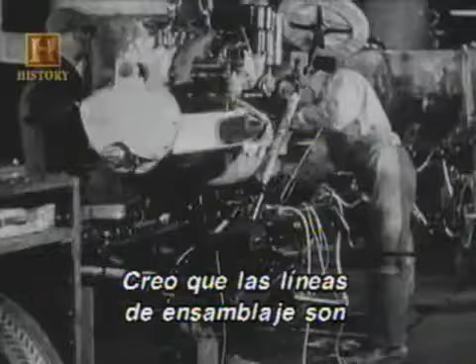I think the assembly line is the most significant technological development of the 20th century. Nearly everything that we use, we would not have it in the quantities we have it and at the prices we have it without the assembly line.

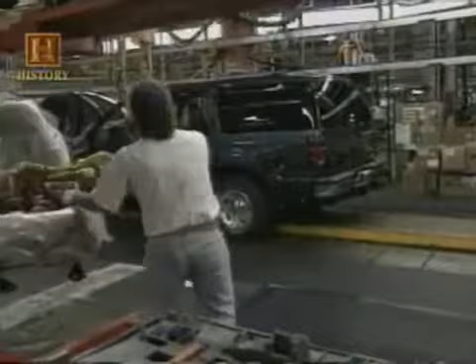I think the best way to define an assembly line is the way Ford did. He called it progressive production. Work moves to the person and moves past the person rather than the person going to the work. Parts are added until you come up with a final product. And that's what the assembly line is, essentially, work in motion principle.

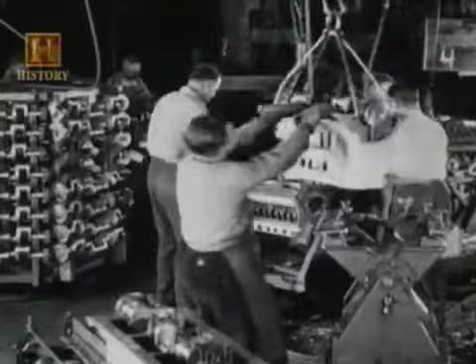Industrial society was highly advanced at the time the assembly line came into being, but once it came into being, it was so productive that very few things were made without the line after that. There are several factors that went into the making of the assembly line. The first had to be that the parts of any product that would be made on an assembly line had to be interchangeable.

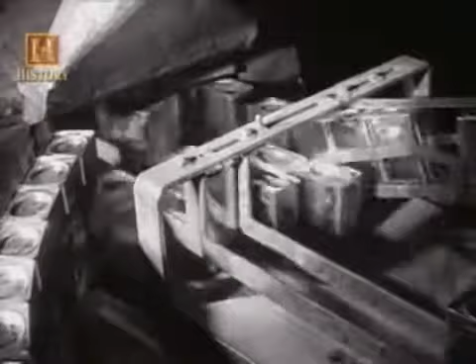And there in can making you have various machines that are linked together by conveyors, which cans are built, taken from sheet steel and built up into full cans.

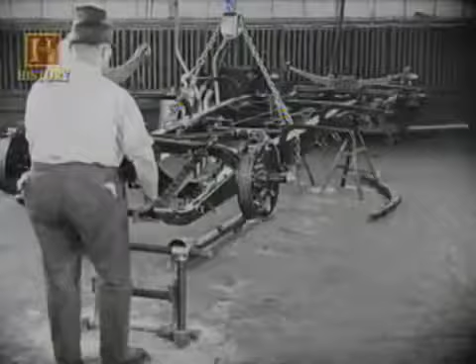He was averaging a doubling of production for several years before the assembly line. But this relentless drive for ever more production at ever lower cost led him almost inexorably to the techniques that eventually developed into the assembly line.

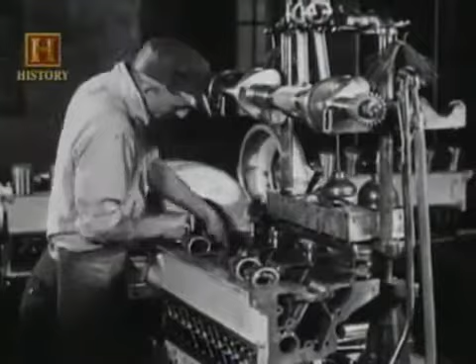Effectively, he Taylorized the work and took the skill out of the work process, dividing the labor, subdividing it again, so that a workman would do a smaller and smaller part of it. And doing the smaller and smaller piece of work, he could do it faster and faster.

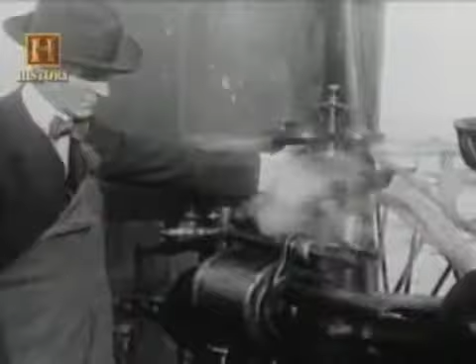The wondrous technology of the assembly line effectively was its undoing relative to labor.

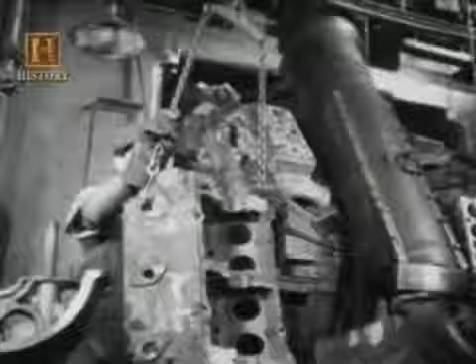It's boring, it's regimented, it's monotonous. It was very difficult to keep a lot of workers in these factories when they first started the moving assembly line.

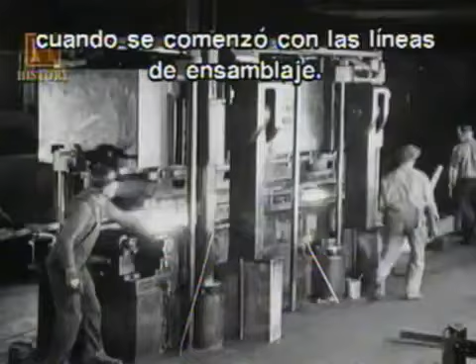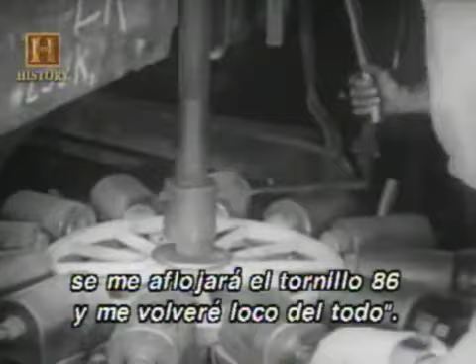A labor leader reported the comment of a Ford auto worker as saying, if I have to put on nut number 86 more times, I will be nut number 86 in the Pontiac bug house. Work became degraded.

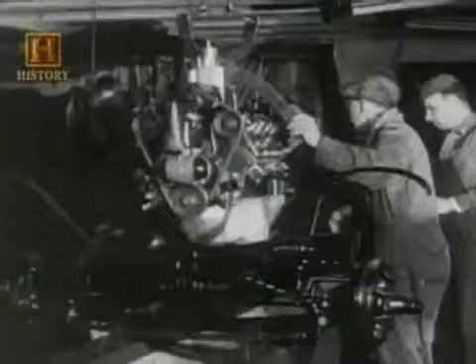A foreman in the Ford engine assembly plant talked about how in his shop, after they introduced line production, what he would do is he'd turn up the speed of the line a notch. The workers would move faster, turn it up another notch, turn it up another notch, and then the workers would scream and they'd turn it back one notch. They said we used to get 10, 15 more machines a day by doing that.

It worked. Turnover dropped, absenteeism dropped, and Ford workers sort of traded the high wages for the rotten work.

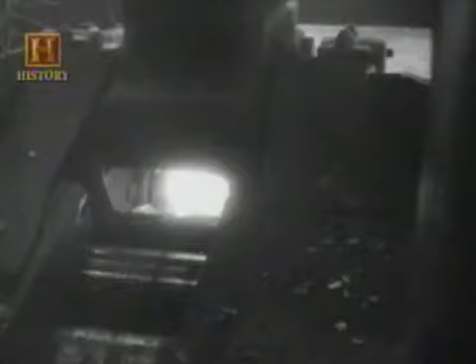I think what happens through the 1920s is that the line, the line speed, and the regime of work in the factory becomes harder, faster, more ruthless.

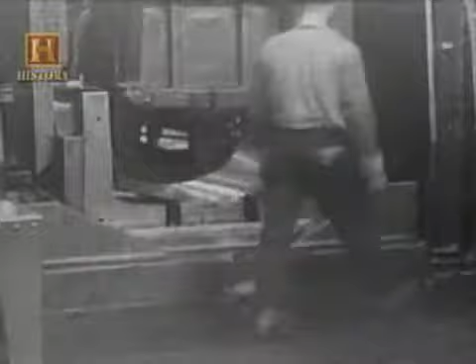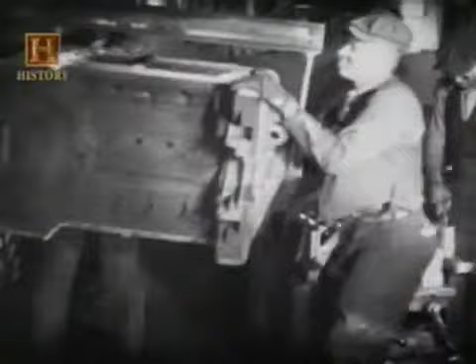Back in the days when he was a millwright, Ford Motor Company was the only company in the Big Three that had any blacks in skilled trades.

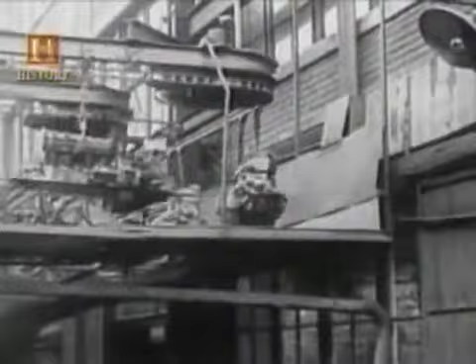First of all, it was a job. I had a job. The assembly line did a lot for a lot of people. It was a phenomenal thing, I guess is the best way for me to put it. The assembly line was a tremendous symbol of modernity, of productivity, of wealth.

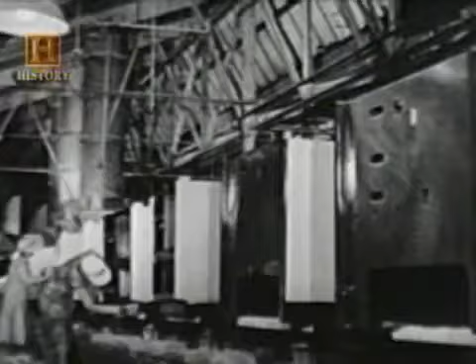You have companies like General Electric, Westinghouse that are beginning to make home appliances with moving line assembly. The assembly line allowed not only more stuff to be made, but more complicated stuff, higher quality stuff, things like radios and phonographs, things that had once been fairly high-end, a kind of material abundance that simply people had never experienced before.

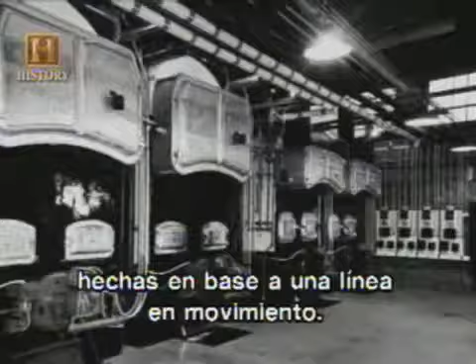A lot of things that actually went into custom-built homes had actually been mass-produced, things like fixtures, bathtubs, etc. Those were already mass-produced.

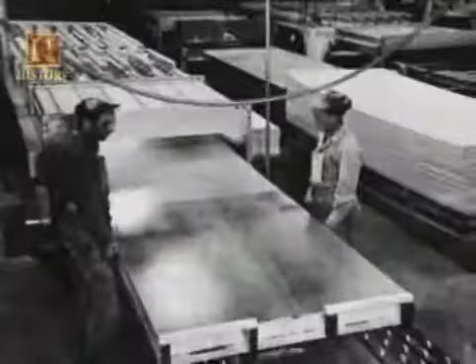Consumers, for the most part, have rejected mass-produced houses.

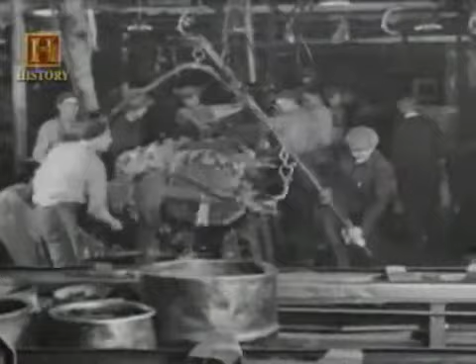En 1927, Ford abandonó a regañadientes el confiable modelo T e introdujo uno nuevo. It was an enormous, wrenching change to shut down his factories, retool them to produce the next car, which he called the Model A, a very different, much more modern automobile than the Model T.

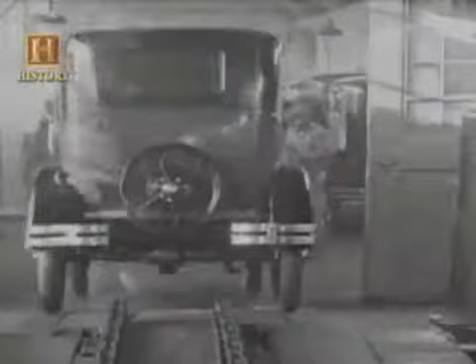El cambio al modelo A le costó a Ford más de $250 millones. Tras haber producido el modelo T durante 19 años, el modelo A requería de un cambio de manejo de sus 5.580 partes, casi todas las cuales eran nuevas. Era una lección extremadamente dolorosa acerca de la demanda de los consumidores.

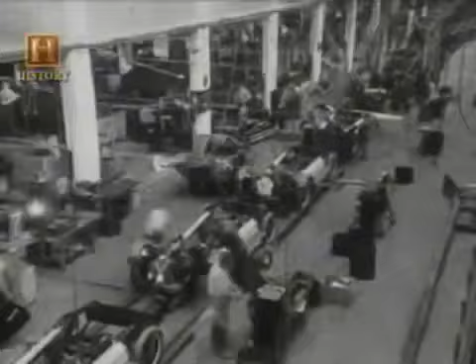General Motors was able to make those kinds of changes much more easily because they had never pursued things as far down that cul-de-sac as Ford Motor Company had. A diferencia de Ford, con sus monumentales plantas industriales, General Motors era capaz de producir diversos modelos porque tenía varias plantas más pequeñas con líneas de ensamblaje dedicadas a los diferentes modelos. El cambio de modelo anual introducido por General Motors pronto se convirtió en un rito para los automovilistas y consumidores estadounidenses a quienes les gustaba la variedad.

Después de más de una década, los fabricantes habían aprendido a dedicar sus líneas de ensamblaje a satisfacer la cambiante demanda. Para 1941, durante la Segunda Guerra Mundial, no había ningún consumidor más grande ni exigente que el gobierno de Estados Unidos. I think Lewis Mumford said that really there's no kind of demand like demand that comes about through warfare, because first of all, you need a lot of things and you destroy a lot of things. Creates this tremendous demand. Here is the arsenal of democracy at work.

One plant among thousands dotted across the vast United States. Las líneas de ensamblaje automotriz de Detroit fueron transformadas. Effectively, what you're doing is create something entirely different. That process of conversion over to wartime industry is one where the whole shop floor is just literally in turmoil.

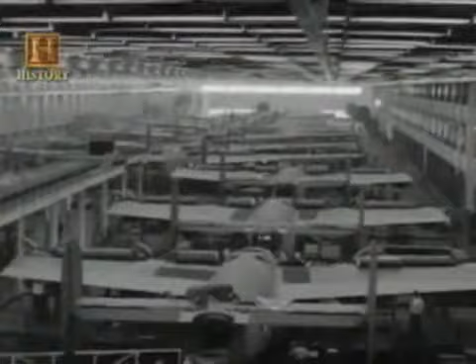Una industria que había sido acondicionada para producir los 32 millones de autos utilizados por los civiles, reenfocó, reajustó y renovó su compromiso para liberar el inagotable poder de las líneas de ensamblaje de tiempos de guerra. Plants that build tanks like these, huge lumbering juggernauts, in numbers that stagger the imagination.

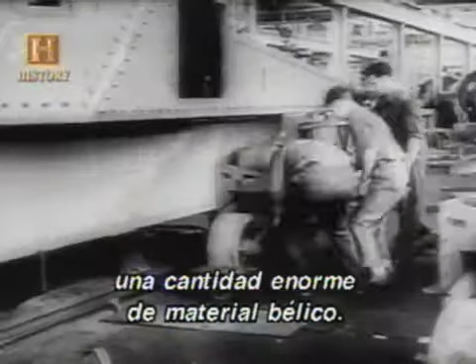If you look at the history of the war, you'll see that the United States created a tremendous amount of war material. World War II also sees the coming in of large numbers of women and large numbers of African Americans. Prior to that time, it was believed that neither women nor African Americans had the skills to work the machinery and the heavy equipment that was tied to the industry.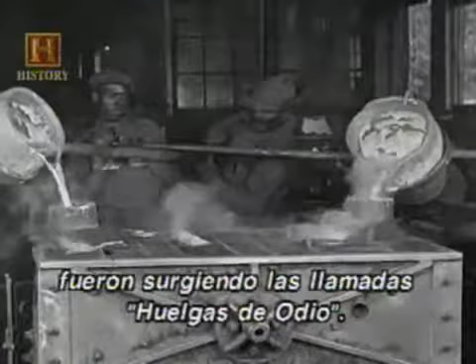There's a lot of contention in the auto industry through the war years. As African American workers are upgraded to the machines and the assembly lines, there are sometimes what are referred to as hate strikes, where white workers would go on strike because they didn't want to see the upgrading of African American workers. The same thing occurred with women workers sometimes.

A pesar de un ambiente realmente hostil, las capacidades de los afroamericanos y de las mujeres fueron demostradas claramente por su rendimiento. This is mass production, as only American engineers know how.

A finales de la guerra, en 1945, se habían producido 90.000 bombarderos, 57.000 motores de avión y 250.000 tanques y rústicos.

One of the major reasons that we won World War II was because we were able to produce all kinds of war material, from tanks and airplanes to clothing and helmets, at a faster rate, at a cheaper price than any other nation on earth. So we were able to build ships faster than the Japanese and the Germans combined could sink them.

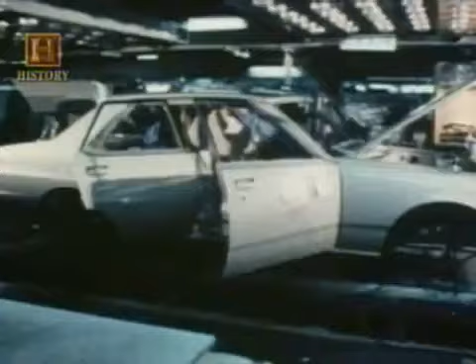Al regreso, el Japón de posguerra reconstruye las líneas de ensamblaje. I think you could say that Henry Ford invented the assembly line for the car, and that Toyota perfected it.

Después de la Segunda Guerra Mundial se decía que la productividad estadounidense era 8 veces mayor que la de Japón, que estaba devastado por la depresión y la inflación. The Toyota situation in the post-war period, back in the early 50s, they really had nothing in terms of resources. It was a resource-poor country. They had no opportunity to waste. Any materials they had, they had to somehow use.

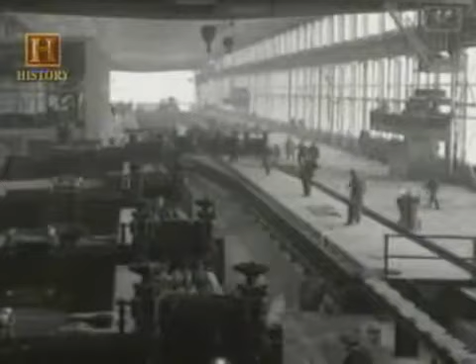En 1950, Eiji Toyota, entonces un joven ingeniero japonés que esperaba reconstruir el negocio de su familia, pasó 3 meses en el complejo Rouge, la instalación manufacturera de automóviles más eficaz del mundo. A diferencia de muchos fabricantes de la época, Henry Ford no sentía temor de compartir el alcance sin precedentes de sus técnicas de línea de ensamblaje con otros industriales.

Ford's assembly line worked great when you had high volume and low variety, hopefully no variety, just one. But Toyota's situation was different. En esa época la Toyota Motor Company estaba produciendo 1.000 autos mensuales, mientras que en el Rouge se fabricaban 7.000 autos diarios. Sin embargo, este no era el único problema de Toyota.

Here they are making 1,000 cars per month. And all those, they had to make all kinds of cars. They had to make trucks, big trucks, big cars, little cars, limousines, fire engines, you name it. They had to make everything for the Japanese market.

It's necessity that compels the Japanese to redefine the responsibilities of labor in a system that is starved for capital and is only serving very low volumes of demand.

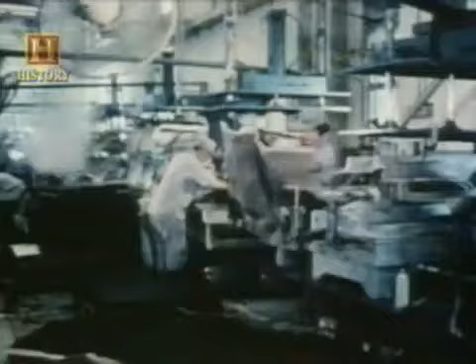Al contrario de las líneas de ensamblaje altamente mecanizadas de Detroit, Toyota construyó sus propias líneas alrededor de su recurso primario, el obrero. And to do that, they realized the most flexible thing in the entire operation are people. Not machines, not anything else, it's people. The Japanese never went as far down this road towards making the worker merely a cog in the machine as we did. They were actually using their workers' mind power, and we had forgotten about that.

En lo que fue considerado un cambio fundamental en la técnica de la línea de ensamblaje, Toyota reorganizó el trabajo, redujo los desechos y le permitió a los obreros definir sus responsabilidades en un proceso llamado manufactura lean. Every job that you see on a Toyota assembly line has been slowly and steadily improved and fine-tuned over the years by every operator who's done those jobs. Toyota managed to involve the workers, to engage the workers, and to give them jobs that actually provide more fulfillment on the assembly line.

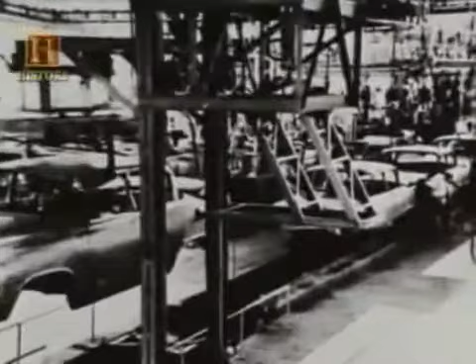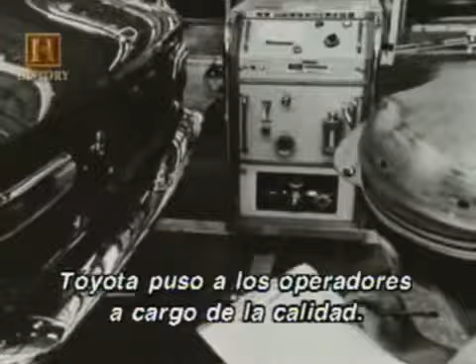Los obreros no solo tenían el deber de definir y mejorar su trabajo, también se les asignaban diversas labores. They do low-end maintenance. They do low-end housekeeping. That means that you have much less support staff in the factory. You have fewer material handlers. You have fewer janitors. You have fewer maintenance personnel. You have fewer inspectors. Toyota said the operators, the plant floor, is in charge of quality. If you have a problem, you stop the line right now.

De ese modo, cada obrero en la línea de ensamblaje se convertía en un inspector. La calidad y la productividad aumentaron porque los obreros podían hacer mejores partes en un primer intento. The productivity tends to be higher in a lean production plant because you are obligating workers to take on tasks which previously would have been carried out by indirect support staff.

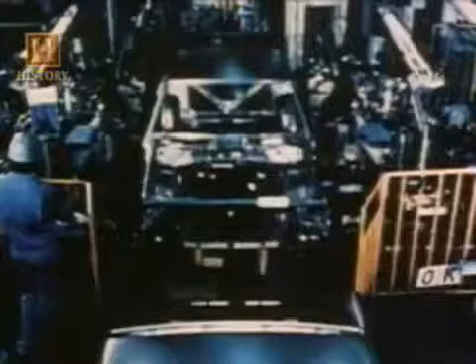They didn't know exactly what number of different products they were going to be making every day, so they had to be prepared to make those every single day. Las líneas de ensamblaje de Toyota requerían que sus obreros fueran diestros, motivados e innovadores, ya que una vez que la producción fuera establecida, los obreros eran responsables de realizar mejoras continuas, un proceso que llamaban Kaizen.

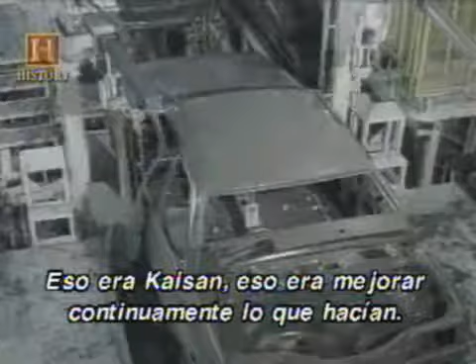You would remove 10% of the workers, 10% of the time, 10% of the resources that backed up that process, and force the remaining workers to figure out how to now get that job done with 90% of what they had before. And so that would be Kaizen, the continuous improvement element of it. Once they had reestablished a certain balance, then you take out 10% again, and you continually ratchet downward the resources available. That is what makes it lean, because you have only the bare minimum necessary to get the job done, and you keep pressing it downward to see what you can achieve in the way of maximum efficiency in terms of productivity.

En los años 70, las líneas de ensamblaje de Toyota estaban preparadas para aprovechar las cambiantes demandas de los consumidores estadounidenses de autos más pequeños y de mayor rendimiento.

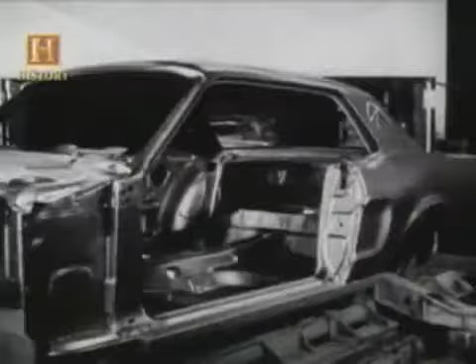To be on your feet 12 hours a day, 7 days a week, was a completely new experience for me.

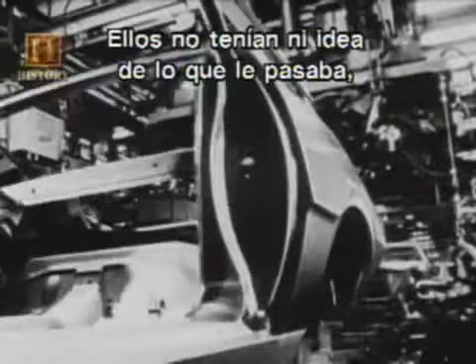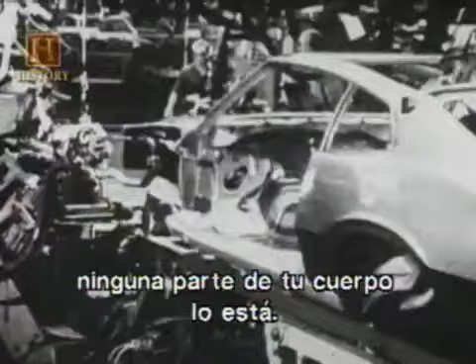I had no idea exactly what she was going through until I came to the Rouge complex and I was hired on by Ford. Sometimes at night I would wake up and it would feel like my hands were the size of a watermelon, and I'd have to open my eyes to look at my hands. Your body isn't made to work at that speed. It just isn't. No part of your body. And I took a tour of every plant in the complex, and when I got to the frame plant, my eyes welled up with tears to think my mother actually performed this work. I couldn't do it. You have to be strong to be able to do that. So your mind has to be strong. So I'm really proud that I'm still sane.

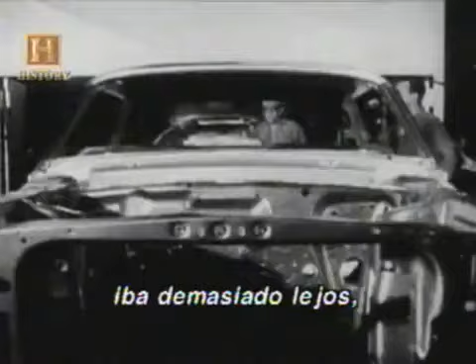What they eventually found was that the application of these principles to the moving assembly line, which required extreme mechanization, went too far and pushed the human element in the production process to the extremes, and people rebelled against that.

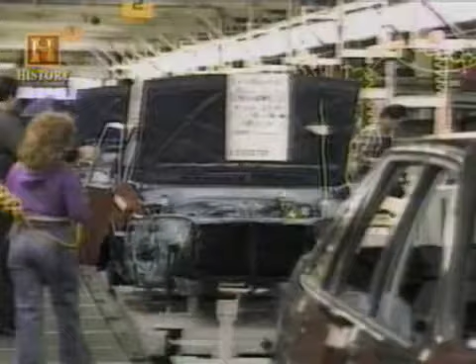The challenge is to make that assembly a lot more user-friendly to people. So as we future the assembly line, we really become a lot more people-oriented. I've seen lines that were ran manually with people on every job turn to automated lines, and it's steadily happening. So it's a big change just in the 6.5 years that I've been there.

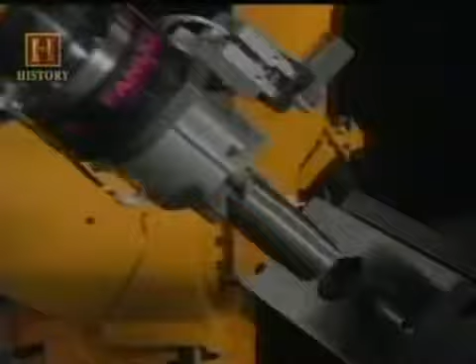Little did they know that science fiction would become assembly line fact in less than half a century. The first kind of tasks that started to get automated were things like welding and painting, environments that weren't people-friendly.

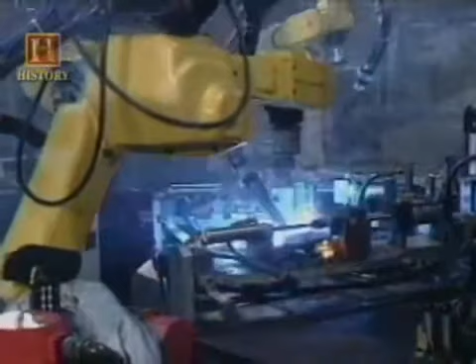Los robots fueron asignados originalmente a las labores de pintura en las líneas de ensamblaje automotriz porque siempre habían representado un riesgo para la salud, mientras que la soldadura requería de extrema precisión y destreza. We weren't trying to displace workers, we were trying to gain consistency, quality improvements, as well as actually benefit the worker by being able to take away tasks that weren't pleasant.

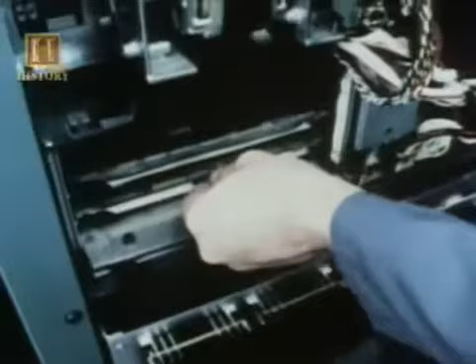Un cambio fundamental hacia las tecnologías computarizadas en el último cuarto del siglo XX llegó a eliminar casi el 37% de los empleos en las líneas de ensamblaje automotriz. Most of the people that are there today are not actually running equipment, they're maintenance people tending the robots. Hoy, los robots con microprocesadores de la línea de ensamblaje pueden manipular materiales complejos, seleccionar y distribuir las partes y llevar a cabo múltiples tareas casi del mismo modo que un ser humano.

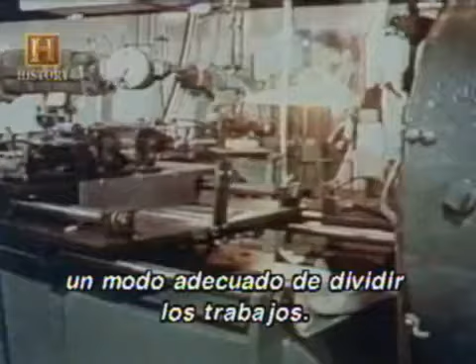We're learning that there are things which computers do better than people, and there are things that people do better than computers. We're learning how to divide the labor so that we get the best out of the computer and the best out of people.

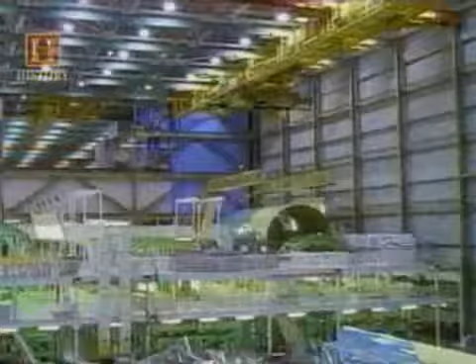You can imagine the process of building an airplane that size. Building every piece that you think will fit to every other piece, putting it together, finding it doesn't fit, going back and redoing another piece. The cost of building a complex part the first time is very, very expensive. So eBuild has a lot of advantages there.

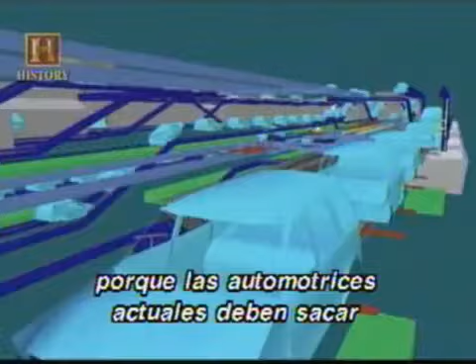The goal of the virtual assembly line is to reduce the time it takes to bring the real assembly line online, functioning, building quality product. That's a serious problem because automakers today are confronted with needing to come out with more models in shorter periods of time than they ever were before.

The assembly line has to become a lot more flexible. As markets break down into smaller and smaller segments, to be able to really maintain efficiency and productivity, assembly lines have to be able to produce whatever the market demands whenever they demand it.

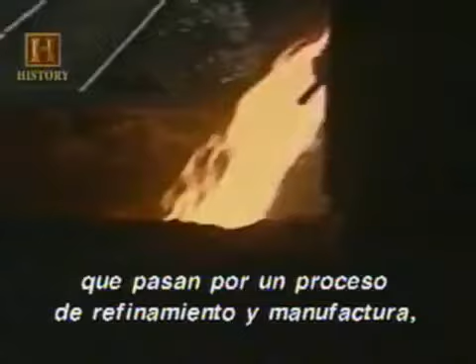It takes today, or historically in 20th century terms, something on the order of 50,000 pounds of raw materials through the refining and manufacturing process to produce a 3,000 pound car. Well, that means there's 47,000 pounds of waste in there somewhere. There's obviously a huge opportunity to become more efficient as manufacturers and as an assembly line, and to become really a superior performer environmentally.

On a global scale, we've got 150 plants in 26 countries. So if we do something well, it can be very powerful.

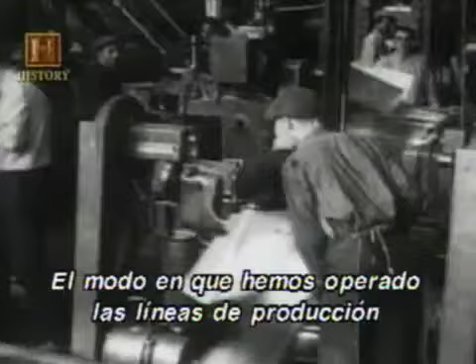What Ford invented was right for Ford's time. The way we ran production lines was probably the best way to run them at that time. We've got a whole set of rethinking to do now.